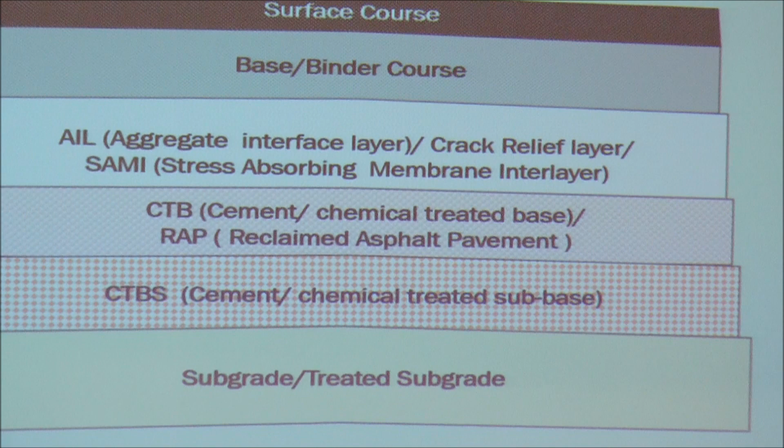Where to use it and how to use it. Then comes the aggregate interface layer, crack relief layer, then the base and binder course, then the surface course. So upper two courses are same, but in these upper two courses also, as Dr. Tanuj informed, they are using other materials also, which we will explain in the next slide.

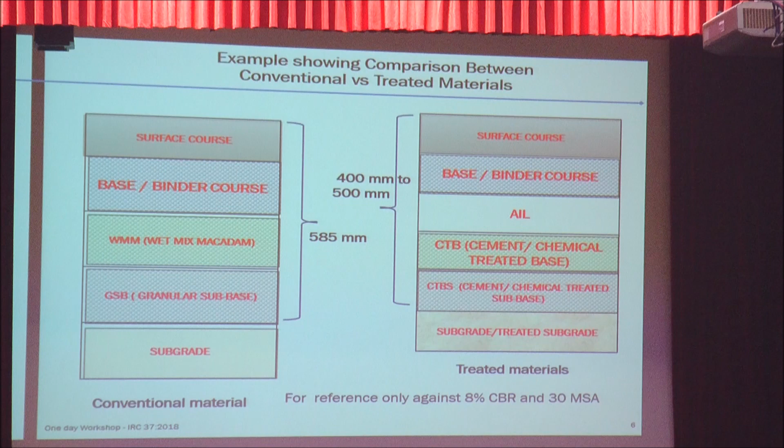So just for reference purpose, in conventional pavement, considering a CBR value of 8% and designing it for 30 MSA, the thickness used to come to almost 585 mm. But when you go with this treated subbase, which we call smart pavements, this thickness can come to 400 to 500 mm.

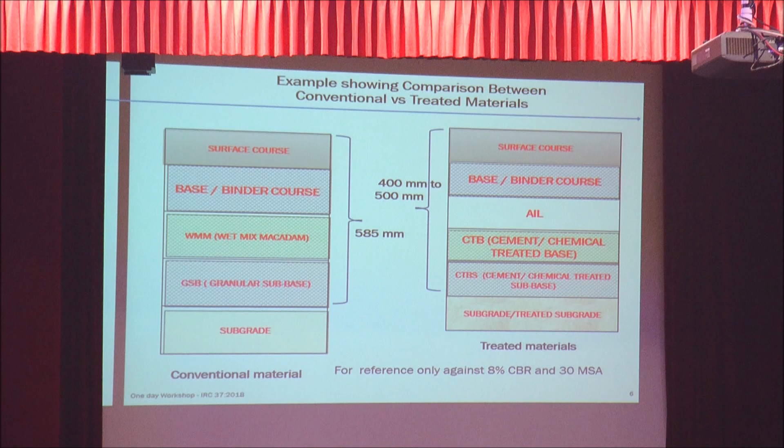So I explained the different layers. So layer 0 is embankment, it is natural existing surface filled up material. Either you have the existing ground, or if the ground is lower, we create the embankment, then we do the filling, that is the filled up material.

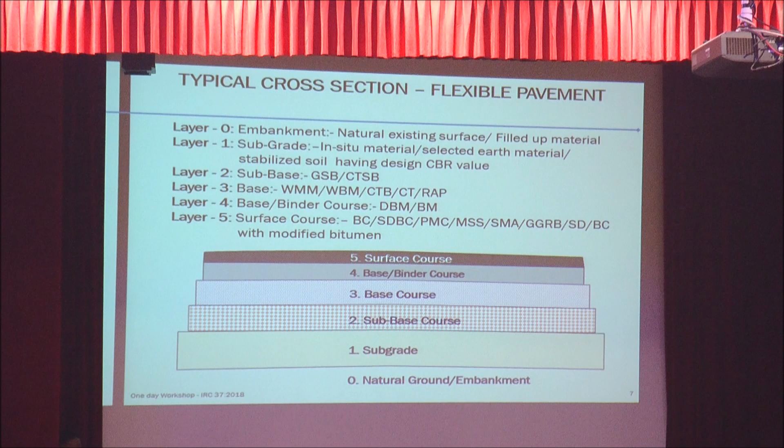Second layer comes subgrade, it is in situ material, selected earth material, stabilized soil. If the level permits you need not import the earth, you can use that layer itself as a subgrade, but you will have to bring that soil to the design parameters of CBR.

Next layer is subbase. In conventional base, it is GSB. If you treat it, it then becomes cement treated subbase. Third layer is wet mix, the water bound macadam, cement treated base, CT or RAP. So these are the basic words which in the next presentation they will use very frequently. That is why I am explaining that these are the words which will be used in the base course.

Then binder course is DBM and BM. In our fifth revision, they have removed BM, but I think they are again going to introduce BM. Then the surface course is BC, SDBC, PMC, MSS, SMA, GGRB, SD or BC. So these are the words which will be used by them.

Bituminous concrete, semi-dense bituminous course, and mixed seal surfacing, stone matrix asphalt, gap graded rubberized bitumen, surface dressing and bituminous concrete. So the first layer we discussed was the embankment. It is natural ground or filled up soil on which subsequent pavement layers are placed. If the level permits, it can be natural ground also. If you are to raise the level, then you have to import the material, that is the embankment.

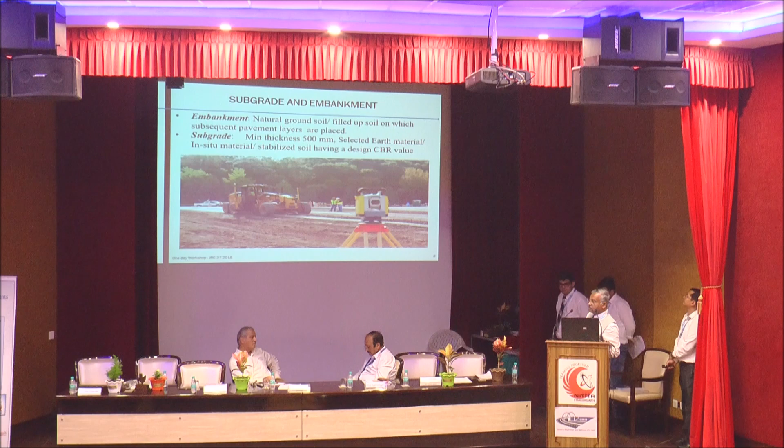Then comes the subgrade. As I already informed, the minimum thickness required for subgrade is 500 mm. If the level permits, you can use the existing ground itself. You have to loosen it and recompact it to bring it to the designed CBR value. Otherwise, you have to import earth of the design CBR value. So subgrade has a design CBR value.

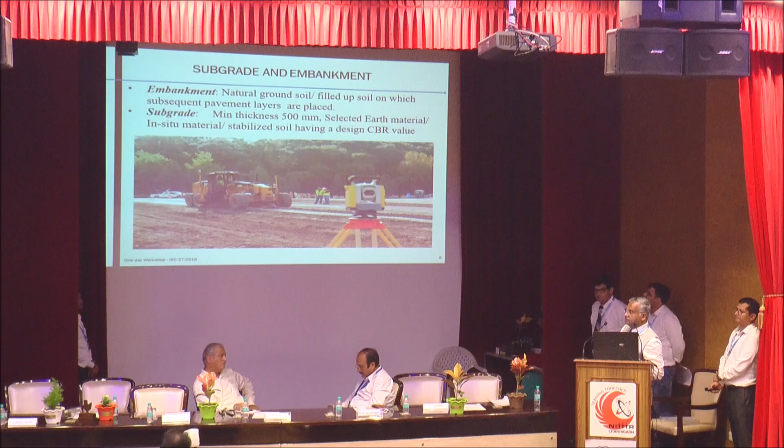Then comes the granular subbase. In granular subbase, in revision 5, most of the people are aware, they have removed RBM.

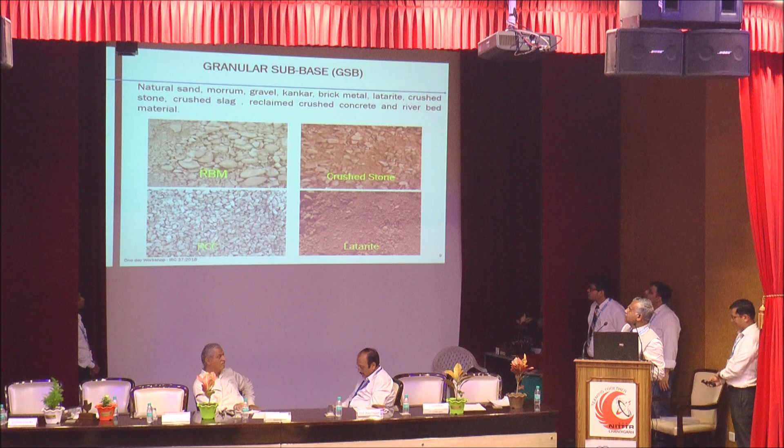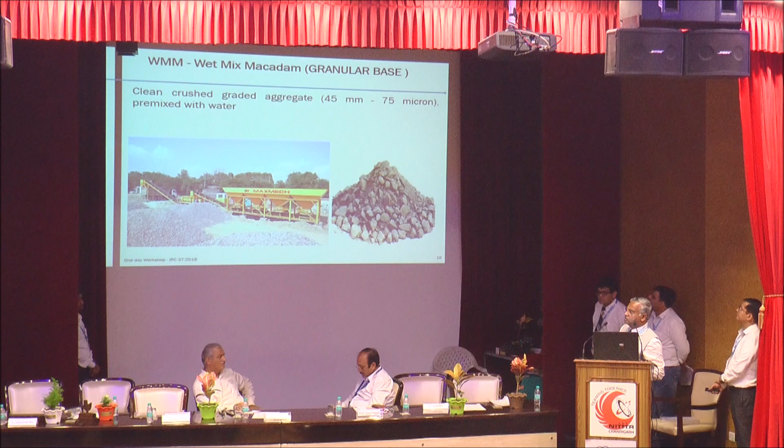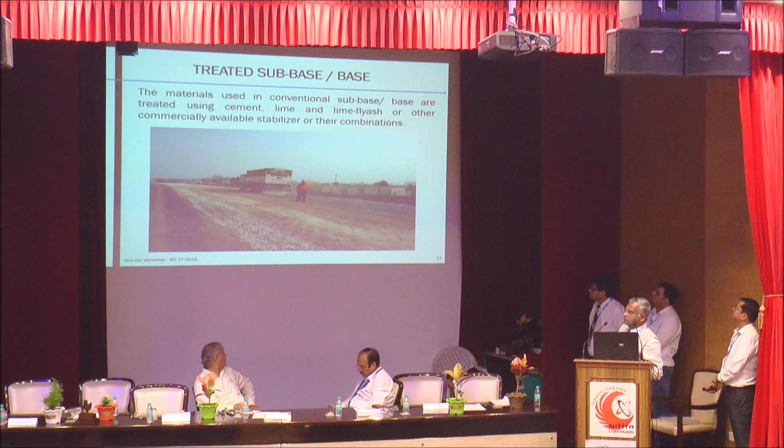Then bituminous layer, DBM, dense bituminous macadam. BM is bituminous macadam. It is allowed up to traffic of 20 MSA only. Surface courses are BC, bituminous concrete, GGRB, gap graded rubberized bitumen, SMA stands for stone matrix asphalt, MA for mastic asphalt, SDBC, semi-dense bituminous concrete. PMC stands for pre-mix carpet, MSS for mixed seal surfacing, SD for surface dressing. Most of the layers have been used by most of the engineers present over here.

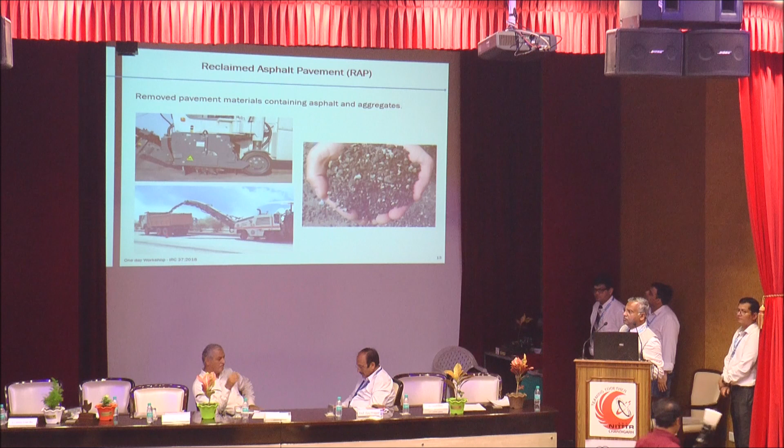Then reclaimed asphalt pavement. As I told you, this is a new concept, but since the last 5-6 years it is used very frequently on almost all highways. So this is a machine. With this machine they reclaim the old asphalt. Then the old asphalt material is used either in wet mix macadam or in bituminous layers also.

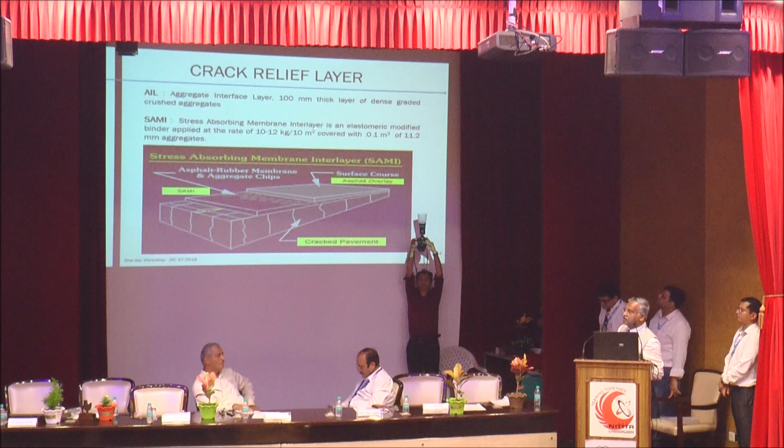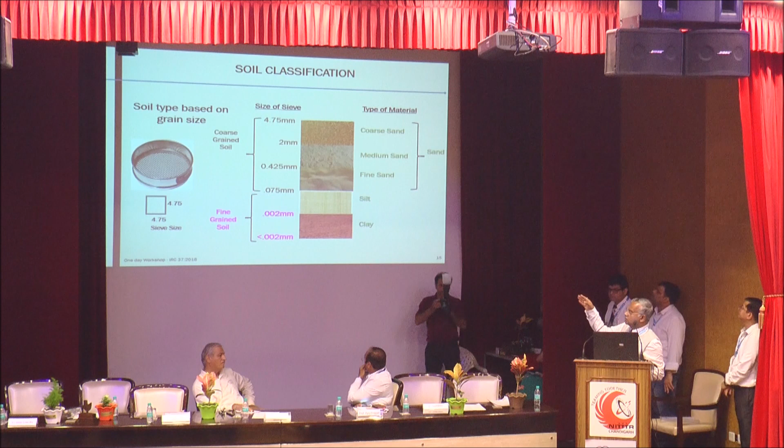So this is the soil classification which we have explained: fine grained soil and coarse grained soil with the size of the sieves.

Then for design of pavement, the word used is CBR. I think everybody is aware CBR is California bearing ratio. So CBR, basically, there is stone in California which when they test as per this procedure, at 2.5 mm settlement the load which comes on that stone is 1370 kg, and at 5 mm settlement it is 2055 kg. So they have declared the stone having 100% CBR. So with that method, we calculate the CBR. Generally it is soaked CBR which is considered in the design of the flexible pavement.

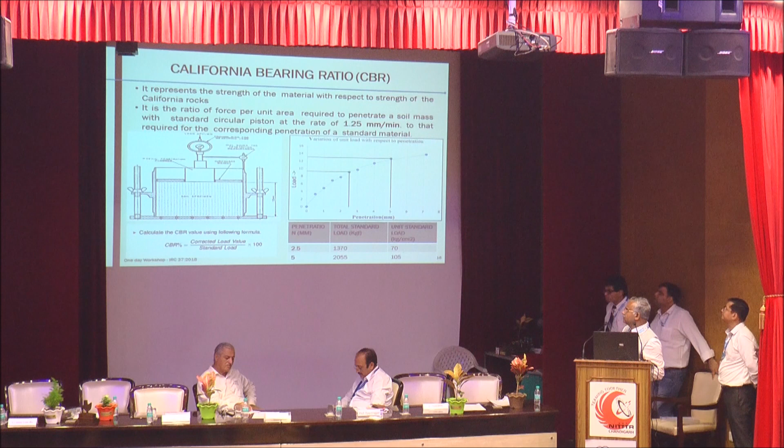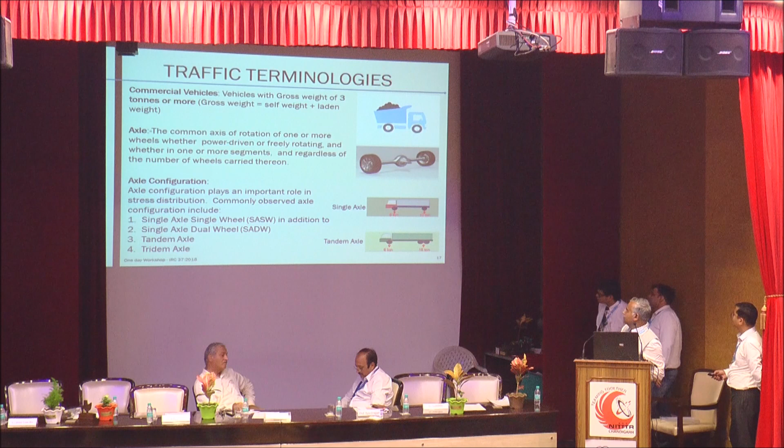Then comes the axle. This is axle. Every vehicle has 2 axles. One is front axle, second is the rear axle. Then in rear axle, we have the single axle dual wheel, tandem axle and tridem axle. So these are the photographs: single axle, tandem axle, tridem axle.

Then they will be using the traffic terminology. They will be using the word vehicle damage factor. So this is the formula by which the vehicle damage factor is calculated. But in our code it is provided that in case you have not done the axle load survey, you can use this vehicle damage factor: for traffic 0 to 150, it is 1.7 for rolling terrain; 150 to 1500, 3.9; and more than 1500, it is 5.

Earlier in IRC 37, 2012, these values were less. Keeping in view the overloading on the highways, these values have been increased and changed now. But for important projects, it is always better to do the axle load survey and find out the actual vehicle damage factor.

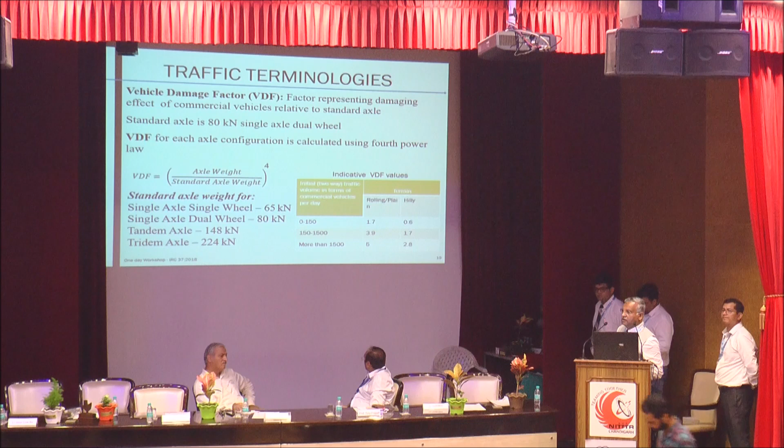So in the last IRC journal which we get, the editor has published that if a vehicle having single axle, meaning one front axle and one rear axle, has a total weight of 25 ton, approximately 6 ton weight comes on the front wheel and 19 ton goes to the rear wheel. The vehicle damage factor is 30 ESA. And if the same load is carried by a vehicle having tandem axle, this VDF goes to 3.2. Now we can imagine how much damage is caused by overloading. It is almost 10 times. Even increasing the axle in that vehicle reduces the vehicle damage factor by 10 times.

One other thing which we use in the design, and generally we get confused with, is which traffic is to be counted. That is the lane distribution factor. We are to count both side traffic, up traffic and down traffic. If it is a single lane, 3.75 meter width, you are to count both. The number to be counted is commercial vehicles only, vehicles having load more than 3 ton. If it is a 3.75 meter wide road, you are to add both the traffics. That means the lane distribution factor is 1.

And if it is 5.5, then you add both the traffics up and down and multiply it by 0.75. In other words, the lane distribution factor which we use in that formula is 0.75. For a 2-lane road, it is 0.5. For a 4-lane road without any median, you add up both up and down traffic and multiply it by 0.4. And in case there is a median in between, for 4-lane, you count either up or down, whichever is more. Or you can have different designs for up lane and down lane separately if there is a lot of difference, but generally it is not done.

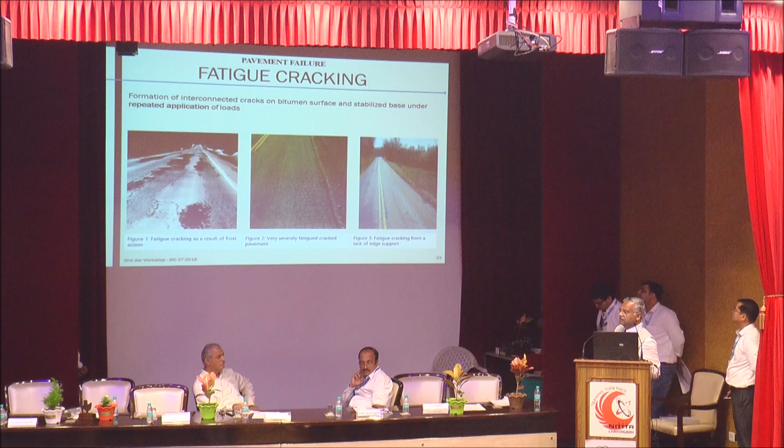Different photographs have been shown to explain the word fatigue. So these both words they will be using, rutting and fatigue. So in the fatigue then they will use the word top down cracking or bottom up cracking.

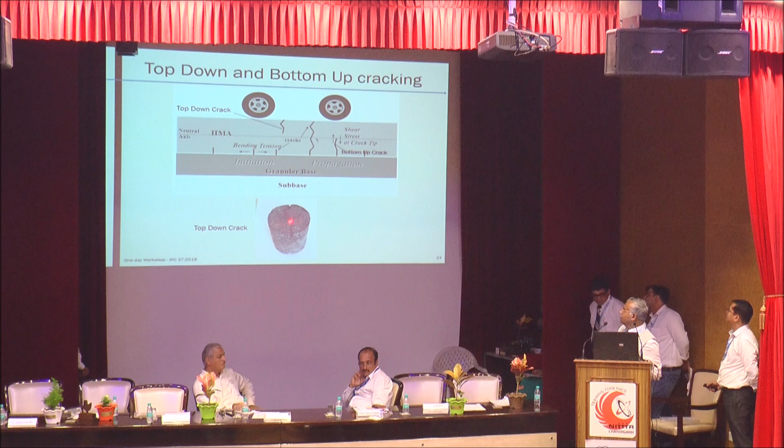So we have all read modulus of elasticity, everybody knows stress over strain. So this is the stress, force over area, strain is change in length over original length. And modulus of elasticity is stress over strain. Whereas the modulus of resilience, it is almost modulus of elasticity, but it is stress divided by strain for a rapidly applied load. So Dr. Bose and Mr. Jha will explain it in detail.

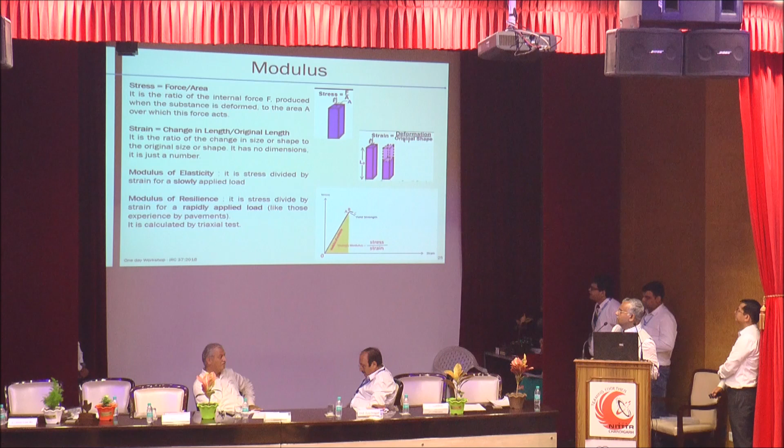So generally we get confused what is the difference between modulus of elasticity and modulus of resilience. So modulus of resilience is stress divided by strain, but it is for a rapidly applied load as is considered in highways and pavements, and it is calculated by triaxial test. Then they will use viscosity.

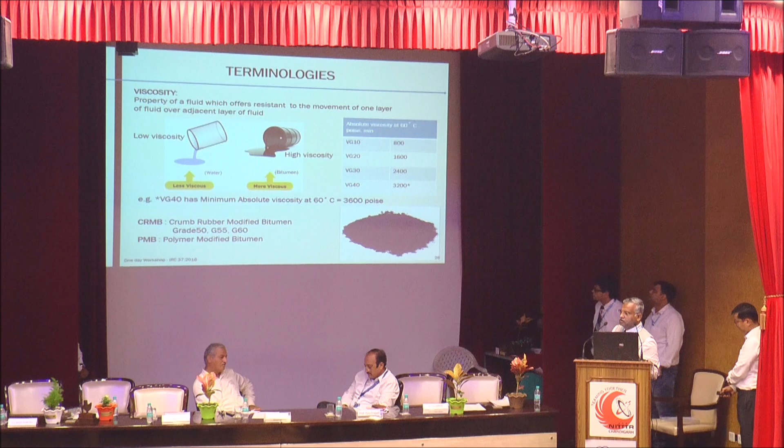Then CRMB, it is a crumb rubber modified bitumen. There are 3 grades. So in the bitumen, to modify the bitumen, they add crumb rubber. People from Tinna industry are here. Anybody who wants to know about the CRMB, they can contact them. Then there is polymer modified bitumen. There are so many chemicals about which I am not expert and I am not very much aware also. They add these chemicals and it becomes polymer modified bitumen. But all these specifications have been given in our codes now.

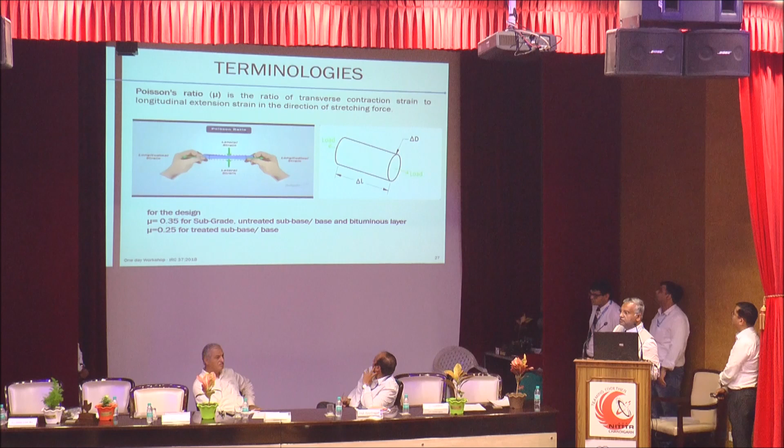Then the word they will use is Poisson ratio. Through the slide show, we have tried to explain the Poisson ratio. And the Poisson ratio, mu, the value as per code, is restricted to 0.35 for untreated sub-base, base and bituminous layers, and 0.25 for treated sub-base and base layers. So this was ABCD of IRC 37.

I got motivated for this ABCD. There was a movie, ABCD, anybody can dance. But now our mission is ABCDE, awareness between civil degree diploma engineers, for which we are conducting this workshop, and we will put our best efforts to continue these workshops in future also. Thank you.